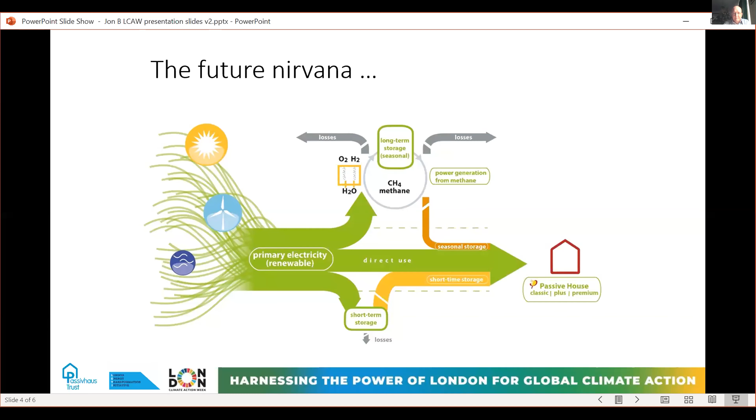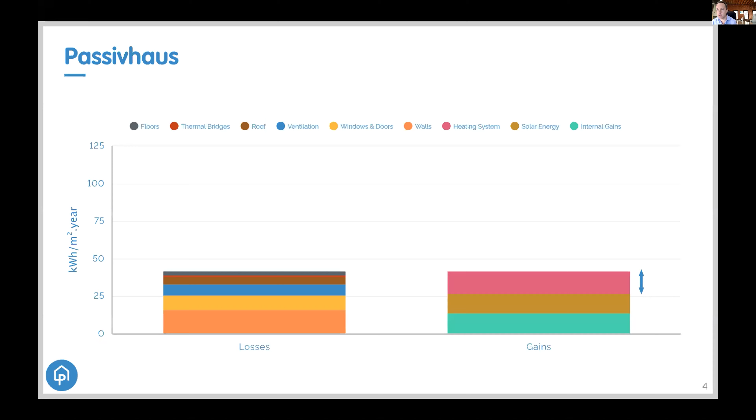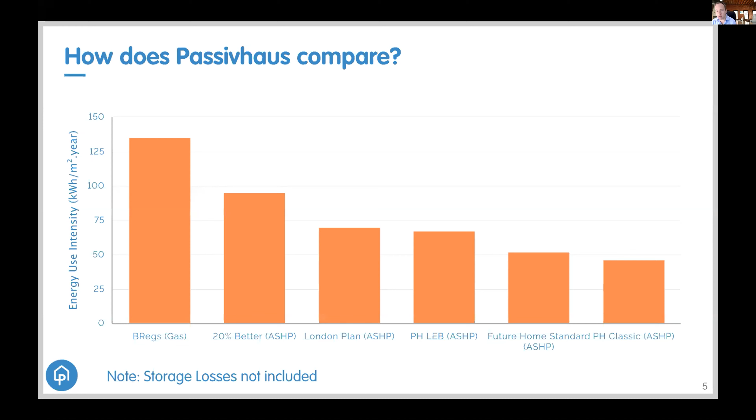So the little pink bit becomes very, very small and moves down to the magic number for Passivhaus, which is 15. That compares very favorably with other standards. You can see where we are now with building regs and a gas boiler on the far left, compared to Passivhaus, it's about a third or less. Even other standards - the London Plan zero carbon plan, the 20% improvement talked about in our recent Part L building reg consultation - Passivhaus Classic comes out better than all of those in energy use. The future home standard is an estimate of what it might be in the future; let's hope we get there, but it will be quite close to Passivhaus, which would be really great to see. So that's what Passivhaus does.

Let's now just go back very quickly 10 years and see what was happening. So in 2010 we had our fair share of man-made disasters, and you might recall the Deepwater Horizon.

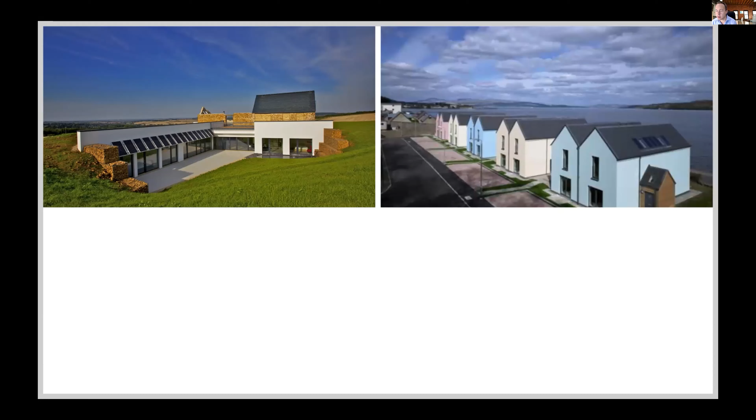And it was actually a year of firsts for Passivhaus as well. So we had the first Passivhaus in England, which was Underhill House. The first Passivhaus in Scotland, in Dunoon, inspired by Brighton's beach huts, apparently. The first cavity wall Passivhaus, Denby Dale in West Yorkshire.

The first Passivhaus educational building, Hadlow College in Kent. And the first Passivhaus light industrial unit, which was also in Kent, the Queen Hill Studio in Kent. So really beginning to see Passivhaus start to get off the ground 10 years ago.

And what has happened since? Well, it's really been a bit of a success story for Passivhaus itself. So we've gone from a very low starting point in 2010, those few pioneering projects, up to over 1,200 projects certified by the end of 2019. But actually more than that, it's the nature of the projects that has changed as well.

So who'd have thought 10 years ago we'd have seen this project, which is Goldsmith Street in Norwich, a Passivhaus social housing project, win the prestigious Stirling Prize in 2019. 93 homes for social rent, and a fantastic architectural achievement, and also a fantastic place to live from what we hear. Then we've got Agar Grove, another local authority scheme in Camden with what will eventually be 493 affordable homes. So again, the scale has increased significantly.

And then we've got Harris Academy in Sutton, our first Passivhaus secondary school. The Leicester Medical Centre, which is the largest Passivhaus building in the UK with over 13,000 metres squared of floor space. And coming soon, or soonish, our first Passivhaus leisure centre, St Sidwell's Point in Exeter, with 3 pools, a spa, a gym, a studio and a cafe. So, you know, just the pure scale of what we were doing with Passivhaus has increased immeasurably in those 10 years. But it hasn't all been good news, I'm afraid.

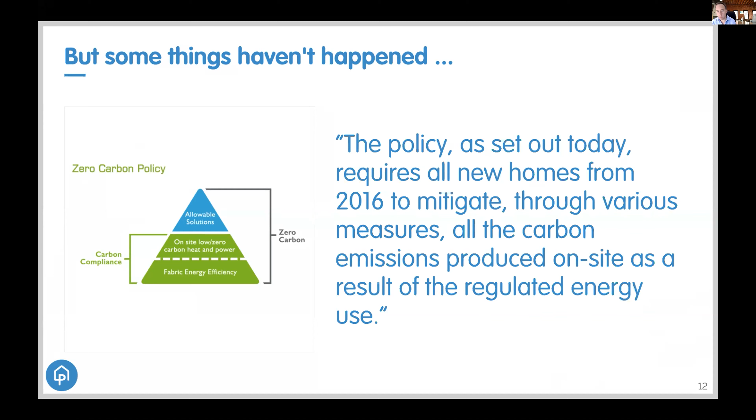So some things haven't happened. A number of you may recall the zero carbon homes standard, which we were due to enact in 2016, which didn't happen, was pulled. So that hasn't happened. And really the charts paint the picture.

So this is the EPC data, energy performance certificate data for new dwellings. The orange line is the EPC rating and matches with the right-hand scale. The blue line is our average energy demand that was lodged, and that's the left-hand scale. And you can see that as of about 2011, 2012, not much has happened, and we've kind of flatlined on lowering our energy use.

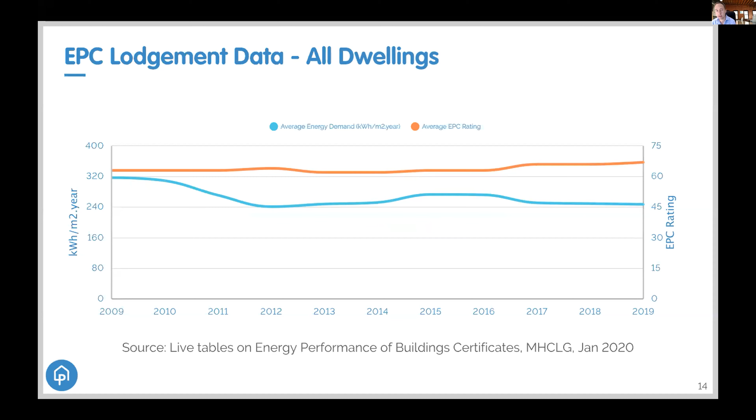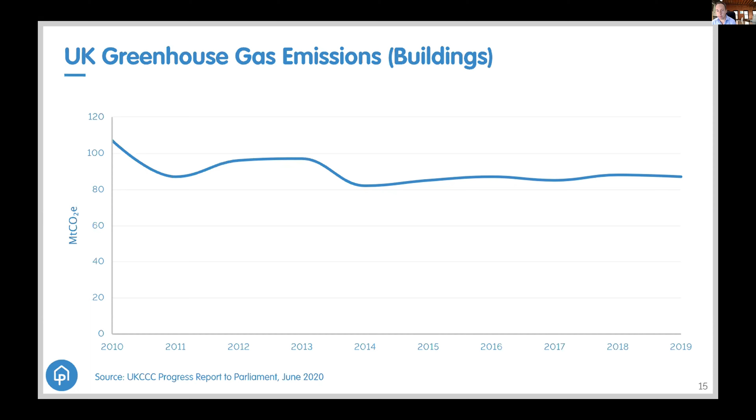And the story is exactly the same pretty much for our all dwellings, so that includes all existing dwellings when they get an EPC update. And that has also been mirrored in our overall buildings energy use, as recently reported by the Committee on Climate Change to Parliament. You can see that it actually has increased slightly over the last couple of years. So we've got pretty much almost 10 wasted years, sadly, in trying to lower the carbon footprint of our buildings in this country.

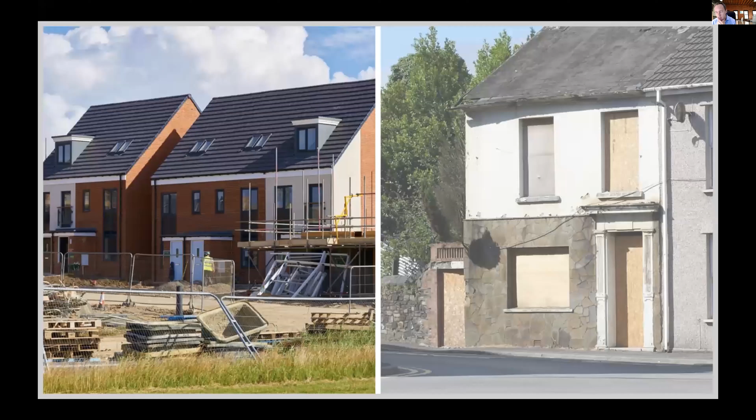So what do we need to do now? What can we do, and what should we do? Well, we've got 2 real areas related to this that need different treatment: our new build buildings, and our retrofit challenge. Maybe not all as challenging as this picture, but certainly it's definitely a challenge. So what could we do? What ideas have we got?

Well, there is an argument that we just sit back and wait for the grid to decarbonise, because we know that the grid carbon intensity - that's the amount of carbon per kilowatt hour of electricity used - is decreasing, and it's decreasing rapidly.

This is one of the great success stories of this country in terms of the power sector. We've come down a huge amount. We're already down to somewhere below 150, 130 to 140 at the moment, and that's due to come down further.

So all this energy efficiency business in our homes, trying to make our homes more efficient, is really expensive. It's quite difficult. So why bother? Why not wait for this to happen, and this will solve the problem? Well, unfortunately, it's not quite that simple.

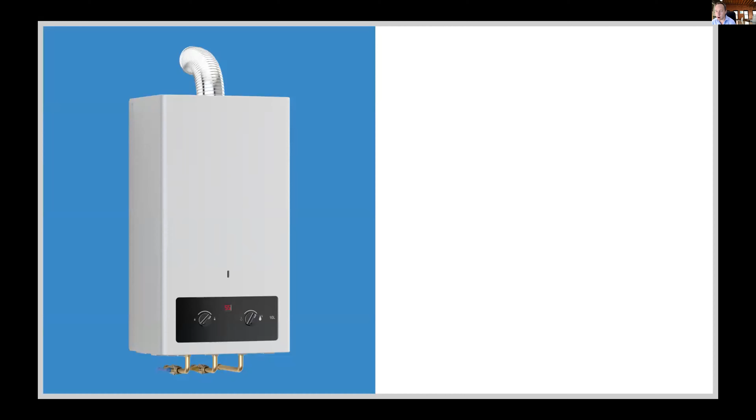There are a number of reasons, but the first is that most of us have one of these in our buildings or our homes, a gas boiler. We can wait for as long as we want for the electricity grid to decarbonise, and it will have no impact if we're using gas boilers, because gas boilers will still carry on burning fossil fuels. So whilst there are some other options, hydrogen and others, which I'll mention towards the end, the main thing we need to do is get off gas.

So if you want some basic rules for getting to net zero, the first one is to stop burning stuff, and in particular, stop burning stuff that comes out of the ground. So we need to move away from gas, and we need to capitalise upon that low carbon electricity grid.

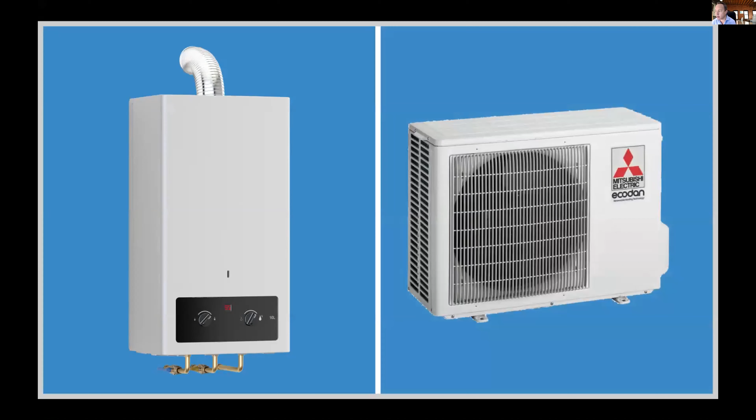One of the options is heat pumps, which will give us an advantage by producing hot water or heating using less electricity than a storage heater or a direct electric panel heater, for example. So these kind of things are part of the future, and part of decarbonising our heating source.

So why don't we just do that then? We'll take out our gas boilers and we'll put in air source heat pumps. Well, again, it's not that simple.

One of the answers is just to look at the peak load scenario. If we added 15 kilowatts, which is a fairly modest amount of heat for some of our homes, to every domestic building in the UK, then we would add somewhere around 125 gigawatts of extra load.

I know that if there are any grid engineers out there, they'll be talking about diversification, and not all buildings will be wanting energy at the same time. But just to give an order of magnitude, if they did all have an extra 15 kilowatts of electrical heat put into them, and it all happened at the same time, that's 125 gigawatts.

Right now, the total grid peak load capacity is around 100 gigawatts. So what that's saying is if we did that, we would wipe out the capacity of the entire grid, and that's not just for housing, that's for everything.

And even in 2050, and this is obviously a sort of crystal ball looking to the future, the grid capacity is only slated to be around 260 gigawatts. So giving pretty much half of that to just our domestic buildings, and just for heating, is not feasible.

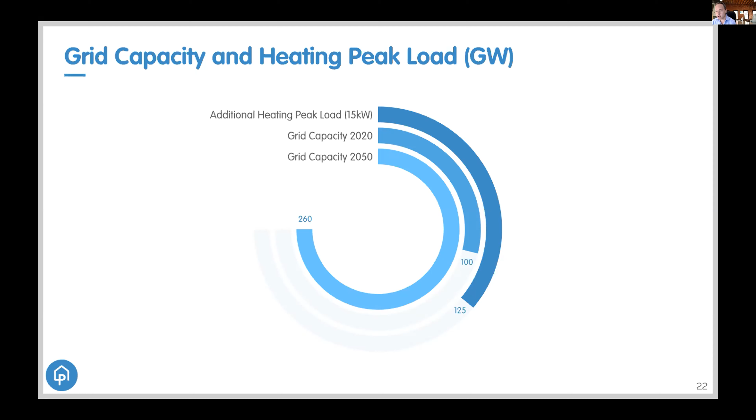So what else could we do? Well, why don't we just throw renewables at the problem? Just as many solar panels or wind farms, whatever, as we can manage. Well, let's look a little bit at that.

If we are trying to get to net zero, we've got two main options. We can carry on as we are and use lots of energy, or we can make things more efficient and use less energy. For both of those options, the way you then get to net zero is you have to generate from renewable sources as much as you use. So in the first option, if you use quite a lot of energy, you have to generate all that energy from renewable sources in order to get to net zero.

Let me be clear, we have no option now. We have to be planning to get to net zero. With option two, we use less energy, and therefore we have to generate less energy from our renewable sources.

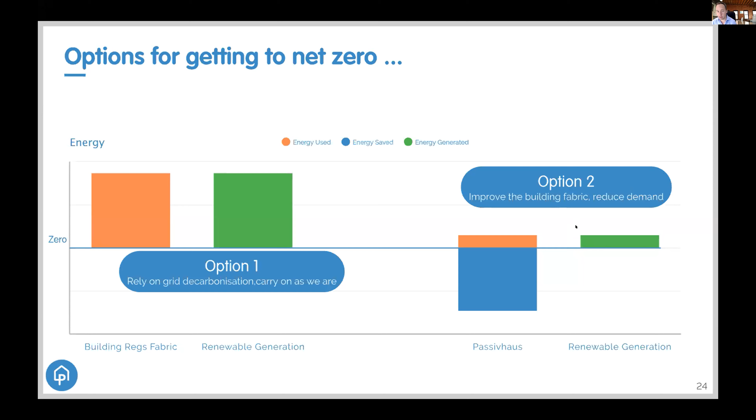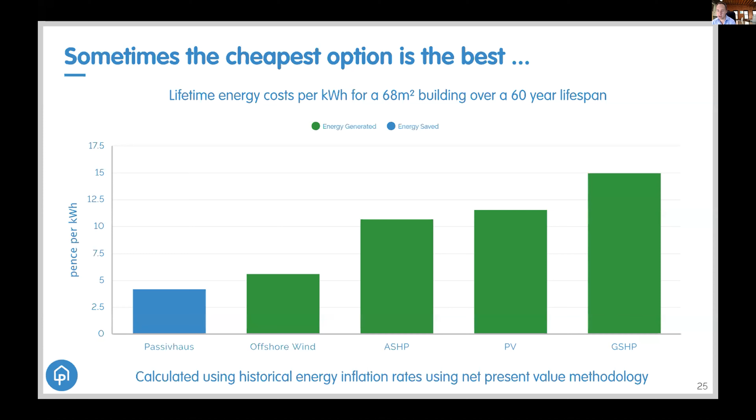But what we've had to do is save a lot of energy through our energy efficiency mechanism. If you look at the cost of that in more detail, this is an indication of the cost, pence per kilowatt hour, looking at energy generated versus energy saved. The cost of building more efficiently works out at around 3 to 4 pence per kilowatt hour, whereas actually generating that kilowatt hour instead of saving it is more expensive in all situations, across all forms of renewable energy we have. So from a financial point of view, it just makes sense to use less energy. The cheapest energy is the energy you don't use in the first place.

But the other thing to look at is: is this pot of renewable energy infinite? I've already alluded to the fact that we've got projections of grid capacity through to 2050, and projections for how much renewable energy we're going to have in the future, in 2030 and 2050. So let's look at what might happen if we made all our houses in the UK Passivhaus standard - not just new ones, but all existing houses retrofitted right down to the best possible fabric standards, so they use the minimal amount of heating energy.

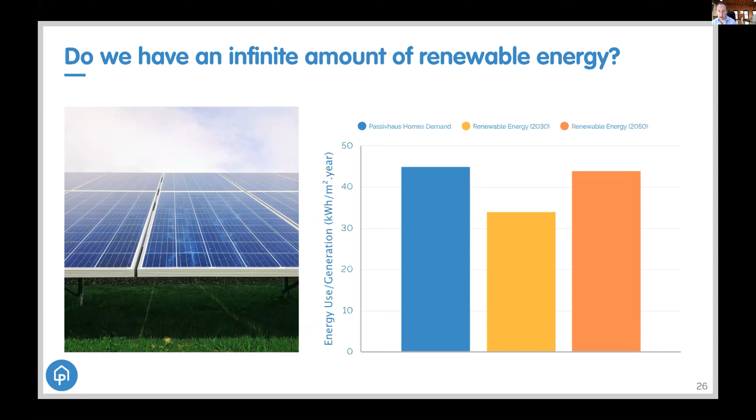That number, 44 kilowatt hours per meter squared per year, is what we'd be at in terms of energy usage for all those properties, per meter squared of domestic floor space. We can now compare that to how much renewable energy we'd have per meter squared - kilowatt hours per meter squared in 2030 and again in 2050. You can see that both the orange and yellow bars are not as high as the blue bars. What that's telling us is that if every home in the country was Passivhaus, on current projections, we would not be able to get to net zero, either in 2030 or 2050.

So I hope that gives you an idea of the scale of the problem. I'm not saying it's impossible. I'm saying it's a big challenge, and to say that we're going to blithely get to net zero in a couple of years without really doing very much, and perhaps throwing some renewables at it, is actually not the right approach. This is a big and difficult problem, and we need some serious answers.

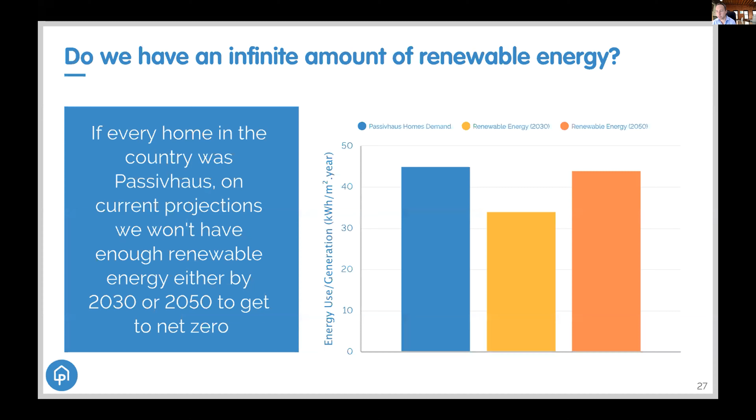So finally, why don't we just mandate every building to be net zero? Because that's going to work - that means everything has to be built to net zero. Well actually, whilst I'm really convinced that we do need to get to net zero, mandating every building to be net zero has got a couple of issues.

The issue is that we're potentially driving bad behavior. If you want to make a building net zero, what you need to do is generate as much energy as you use in that house. And what we know is that even if a house is built to Passivhaus standard - the best fabric standard we've got at the moment in the world - the amount of energy you can generate is limited, because you've only got the roof space on that house. If we've got a single detached dwelling, a bungalow for example, we can just about make that individually net zero with the amount of roof space for solar and the efficiency of that building.

But if you then make that building 2-story or 3-story, you've made more inside space, but you haven't changed the amount of roof space, because we're making very efficient use of that piece of land. What that means is that if you force or mandate people to make every single building net zero, either they will build lots of bungalows, or they will look for ways around it - offset schemes and other ways to get around that net zero requirement. And that's not what we want.

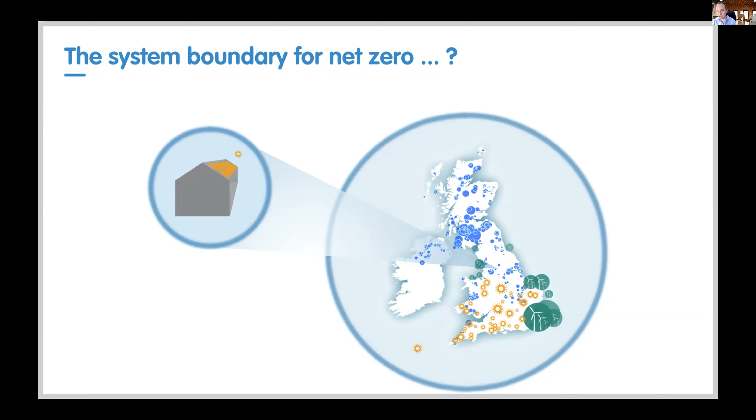And that's the equation we need to be looking at, not at an individual dwelling. So that takes me to really a summary of what we need to do for our new buildings.

Because this is so hard, we need to be at the best possible fabric performance that we can get to. We need to be using as little energy as possible, particularly for our space heating, which currently is our biggest demand. So that takes us towards a very good fabric standard, Passivhaus perhaps as a minimum. We could be going beyond Passivhaus, and perhaps we will need to go beyond Passivhaus. Anything less is simply adding to the problem.

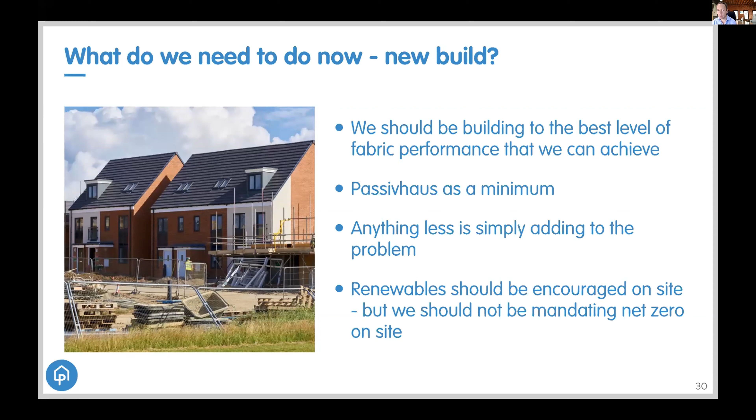Every house we build now will need to be retrofitted because it's not at that standard. And finally, we should be encouraging renewables. We should be encouraging the best possible use of the site. But if we mandate every building to be net zero, we will drive bad behavior and we'll get outcomes that we don't want.

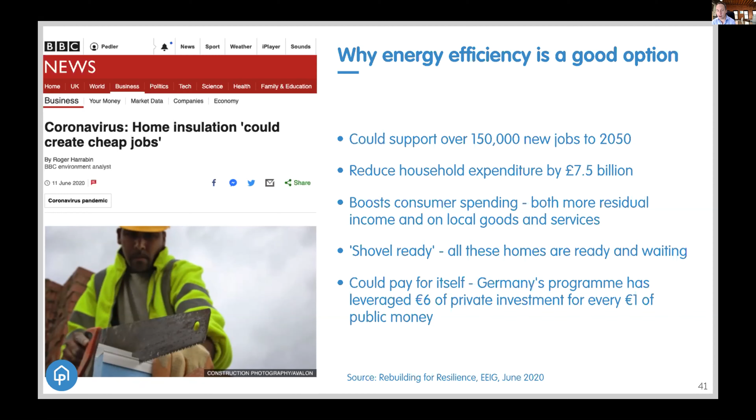It could pay for itself, and just to coin a phrase that's been popular recently, it is indeed shovel ready, because all those homes are out there waiting to be insulated, waiting to be retrofitted.

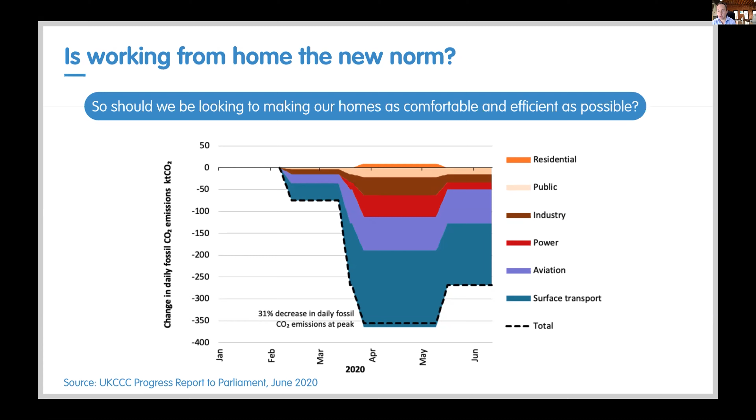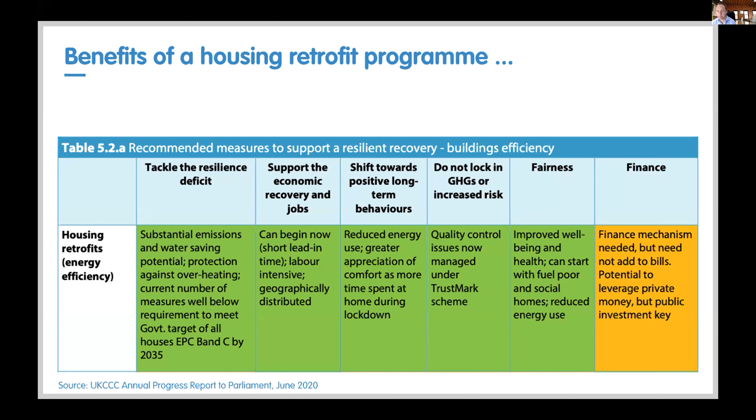There are more ideas as to how we can leverage our construction sector to support this green recovery. I mentioned the Prime Minister yesterday, he made an announcement of 5 billion of money. Some of that has already been announced, but let's say it was all 5 billion of new money. And let's say that the climate change budget we talked about earlier was around 45 billion per year, which is what the Climate Change Committee has said we actually need - that much investment every year, year on year to 2050 to fully combat climate change. So it might be a start, it might help us get out of recession, but there's a lot more to do.

And that is only 0.23% of GDP. So in another 10 years' time, perhaps we might still be here with even newer technology, talking to each other and looking back at what happened and where we went. What will we have concluded?

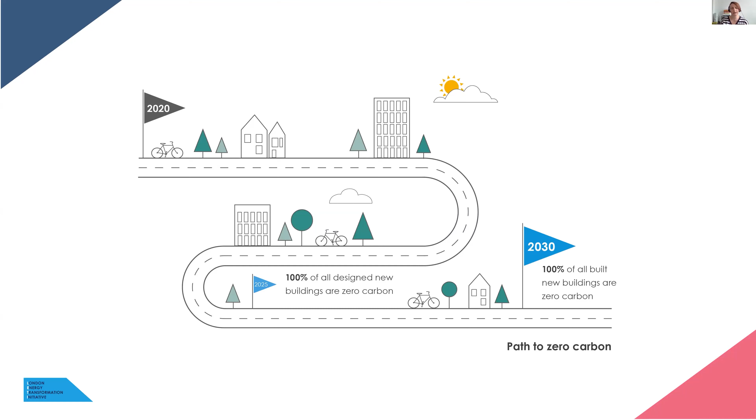If you work backwards from that, it means 100% of all those buildings need to be designed as zero carbon by 2025—perhaps 80% by 2024, and so on. So really, right now, today, we need at least 10% of all newly designed buildings to be net zero carbon. This allows a feedback loop and learning curve so we can keep hitting those targets year on year. It's a daunting task, but we're going to show you how to do it.

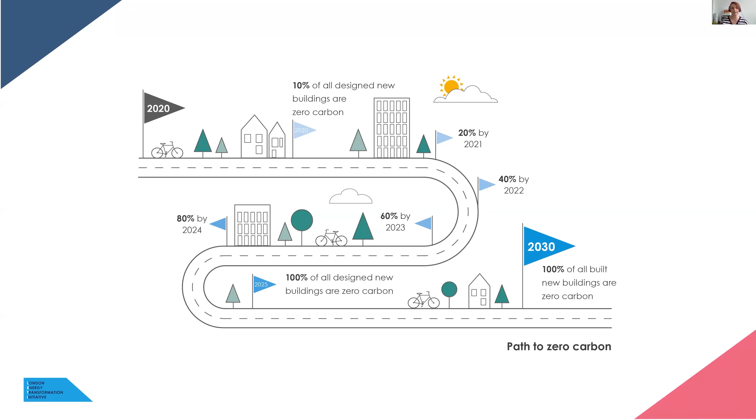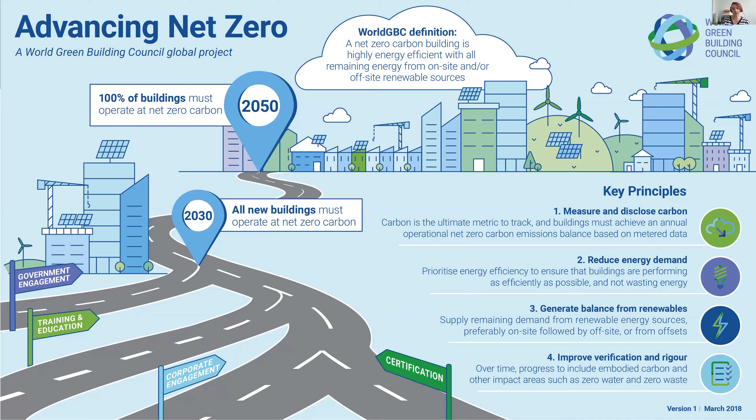As I mentioned, we did a precursor to the Climate Emergency Design Guide—a one-pager that came out in the latter half of last year. In that process we had a lot of conversations with the World GBC to really get to the bottom of the definition of net zero and what we could agree on as an industry. We consulted policymakers, clients, contractors, designers, and consultants—not just navel-gazing among other design consultants.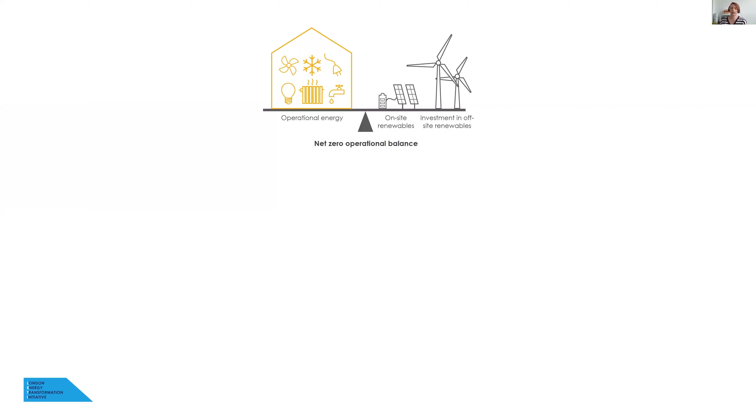I won't go into this too much since John did a good job explaining it in his presentation. One key concept is the net zero operational balance—what you actually use in your buildings versus what's available to you on site and off site nationally. It's a crucial balance that gets us thinking about two system boundaries: the one within your building and the one within the national grid.

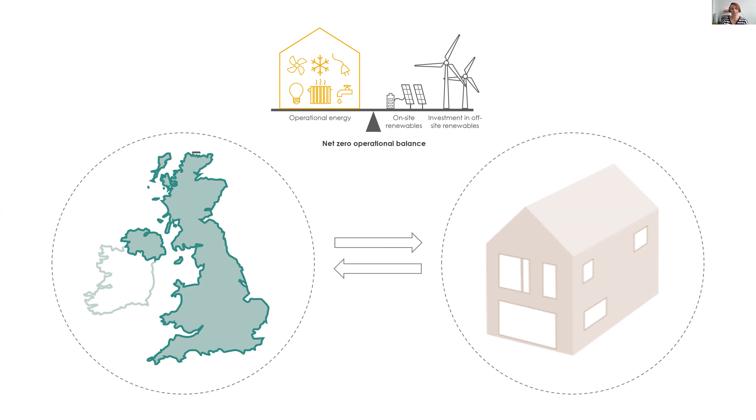The five sections we expanded on in the one-pager started with operational, which is probably the one most people are familiar with. We set some targets and fabric performance standards there. A fundamental piece of this design guide is moving wholesale away from measuring carbon as a percentage reduction in CO2 emissions, because that's not an absolute number—it's a comparison with a fixed building specification that permits inefficiencies and doesn't account for everything. So the Climate Emergency Design Guide says we must move to an absolute number: kilowatt hours per meter squared per year, energy use intensity, or EUI, measured at the meter. It's black and white, no bones about it. This is a fundamental concept—everything we talk about is in EUIs.

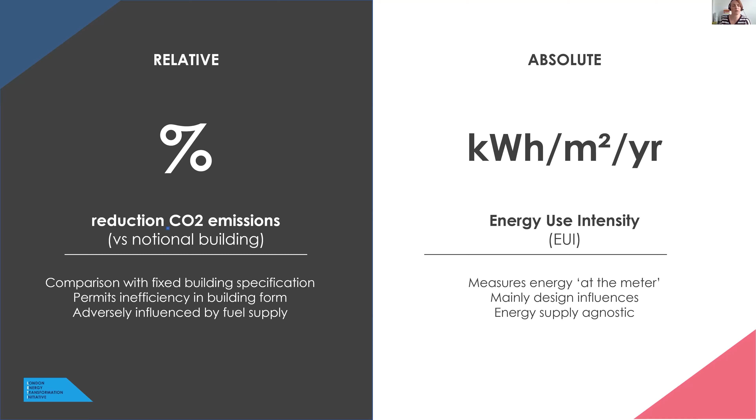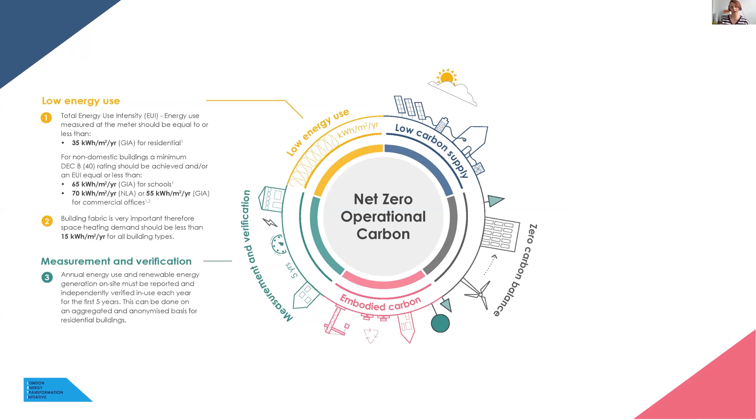The next part of the one-pager talked about measurement and verification. The performance gap has been known about for some time, and we feel this is a fundamental part of the process—mandating that annual energy use is verified each year for the first five years, then disclosed and shared publicly. I'll come back to embodied carbon later. Low carbon energy supply is about what we're getting, where it's coming from, what we can rely on, and the trends. Then there's the zero carbon balance, which I spoke about a moment ago.

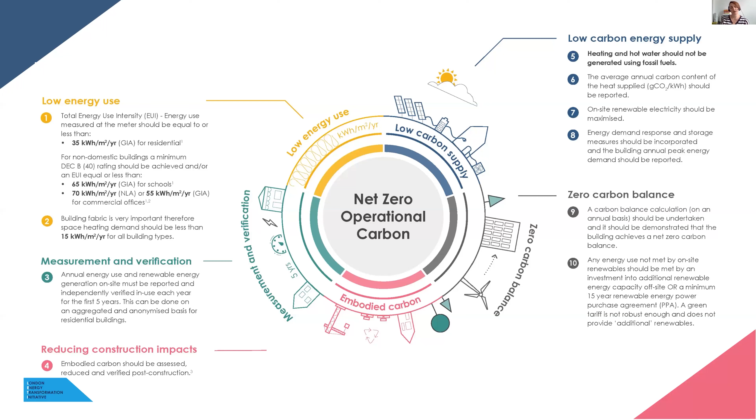Those are the five key aspects of the one-pager, which segued quite smoothly into the overall design guide—the five chapters largely follow that structure: operational energy, embodied carbon, the future of heat, demand response, which I'll talk about, and data disclosure, where we'll discuss that performance gap.

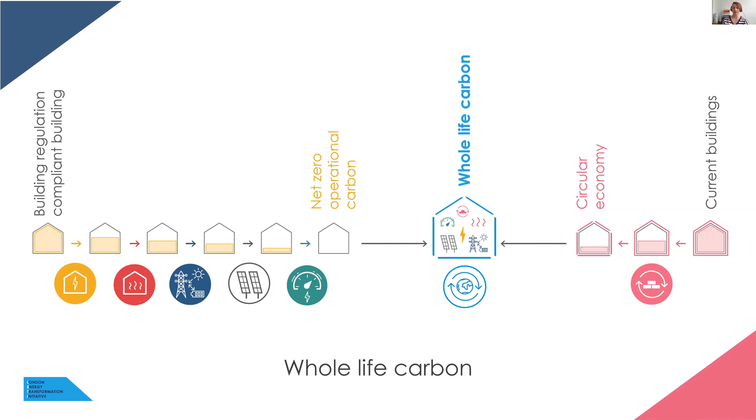On the right-hand side are elements to do with embodied carbon—something you've probably been hearing a lot more about in the last 6 to 9 months. That's about the circular economy and reducing its impact. Both sides together in that little house represent whole life carbon. Unless you're considering both together, you're not really talking about net zero. We talked about the balance, and we'll go through that again.

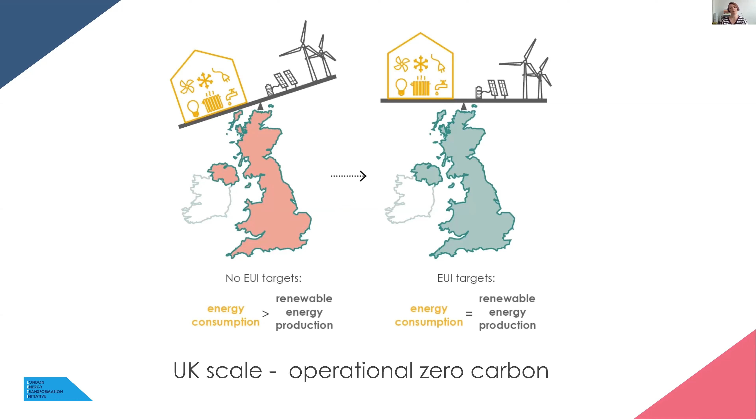So what the design guide takes you through are a series of archetypes or typologies. There's a one-pager for each of these typologies, and we worked out that 75% of all new buildings can be covered by 4 archetypes: schools, small housing, medium and large scale housing, and offices. Obviously it doesn't cover the entire built sector, but we thought that was a really good start in covering the vast majority of new build projects.

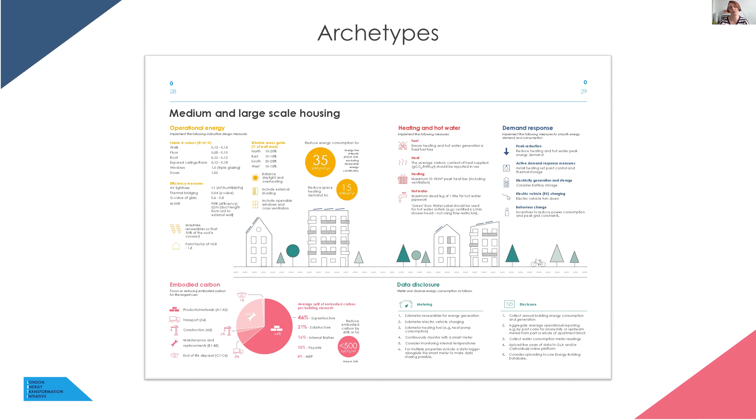Similarly, this is probably more project manager, client-led, and project architect-led. It gives you a stage-by-stage guide as to precisely what to do within the process, how to roll that out. We've got one for operational and one for embodied. So if you have nothing else, you've got that in front of you at your design team meetings, and you can start understanding what your key tasks are to roll out. We thought those two guides really were quite fundamental in giving people an immediate sense of what their roadmap is.

So the key performance indicators - this happens to be the operational energy chapter. The first set of numbers are to do with the EUI, the energy use intensity. Those are fairly well-researched numbers because with the archetypes came a whole army of people doing modelling of those archetypes, a sort of bottom-up modelling, to arrive at those numbers. So there was a bottom-up set of numbers and a top-down set of numbers to understand what would be available from energy outside the building. We've got space heating demands and renewable energy as well.

So in arriving at those targets, this speaks a bit to the bottom-up modelling. The current Part L average is 140 kilowatt hours per metre squared per year. The really good buildings are 43. The bottom-up modelling that we tested is a bit lower at 32. So I think taking all things into consideration, we arrived at the LETI proposed target at the bottom there of 35, which we do believe is quite achievable.

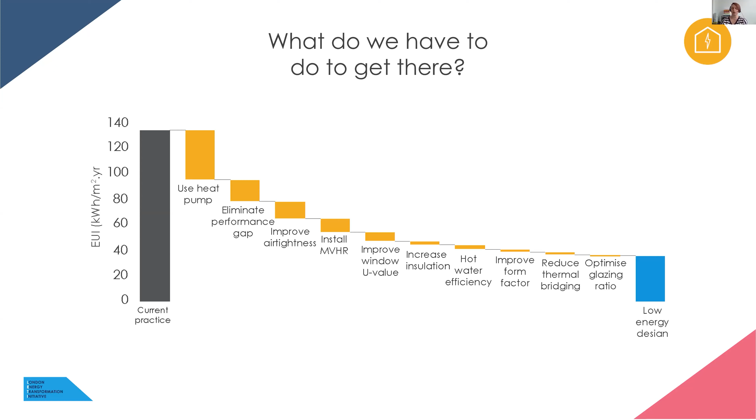So what do we have to do to get there? Well, I think lots of people tend to take on one or two things per project. What we're saying is you've got to throw everything but the kitchen sink in there. So we're talking about heat pumps, eliminating the performance gap, improving your air tightness, MVHR, U values, insulation, and so on and so on and so on. All of those things together will get you to the lowest possible energy design you can make in your building, and thereby requires you to rely as little as possible on the energy supply.

This was a really interesting one for me as an architect, because I always understood that, for instance, north-facing windows performed less good. But we actually understood very quickly that it probably takes twice as much energy to heat a space if it's got only north-facing windows as not. So it certainly speaks to passive design, and starts to raise some very interesting questions about urban design, north-facing streets, and all sorts. But certainly known from the London plan that single aspect units facing north are not desirable, and this is just another reason to understand that a bit better.

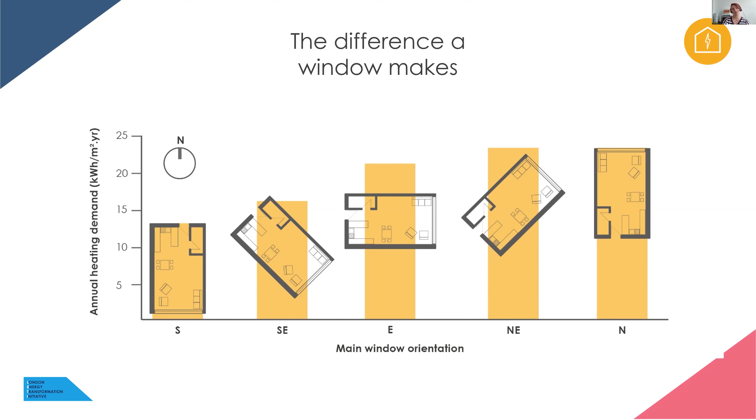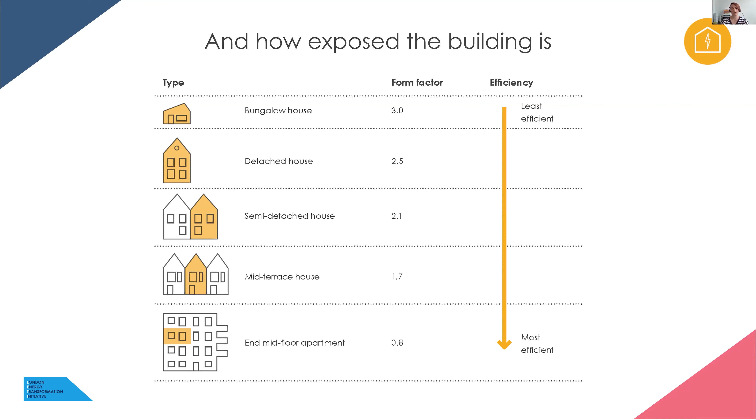We also know that single detached houses perform the worst because obviously they have the most exposure to the elements, whereas larger apartment blocks have got less exposure and tend to be the most efficient. I won't go through all the nitty gritty of this, but these are all graphics that are in the design guide, so easy enough to get to if you haven't got access to this presentation. We take you through what we call a heat decision tree, which again just guides you every step of the way with your consultants and clients to work out, are we doing enough every step of the way?

And it gives you, if you work through that tree, you can make sure that by the end of it, you've reduced your peak demand as much as possible.

So just a quick word on demand response measures. Really, that's about flattening the curve, flattening the energy curve. It's a mantra that's in the forefront of our minds at the moment. It's about relying less on the grid so intensely at certain parts of the day, and finding ways for the grid and the demands of the building to work in unison better.

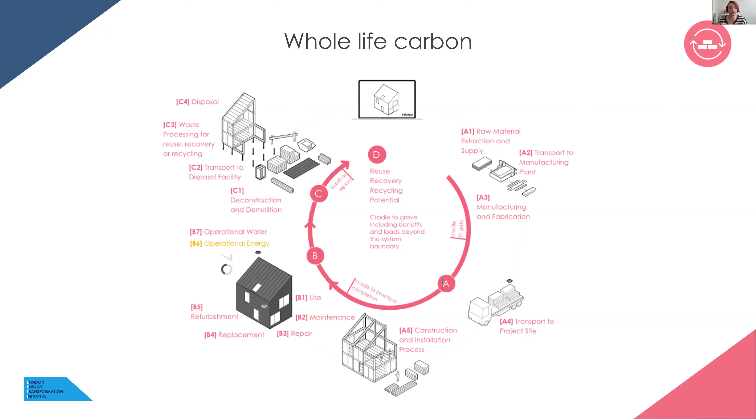We talk about whole life carbon in there in terms of where it's coming from, the raw material and extraction, how it actually gets to your site, how it's put together and installed, what it means in relation to the operational aspects of the building, and most importantly, which is something we don't often think about, is how the products and materials are either dismantled or recycled at the end of their life, so a cradle to cradle approach.

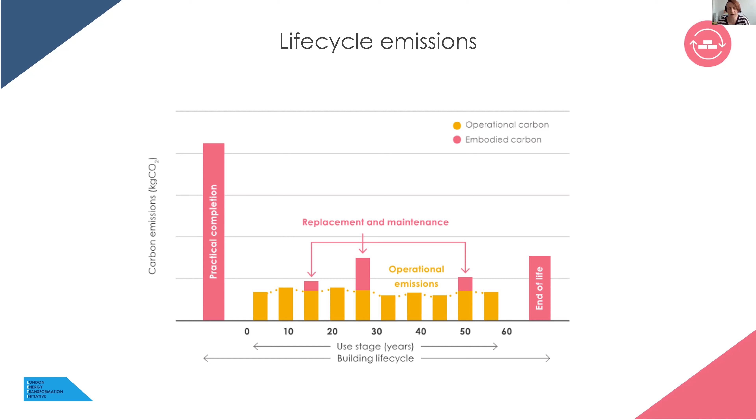Another couple of key concepts quite important to do with embodied carbon: at the beginning you get what we call a carbon burp when you're actually installing everything on site. In terms of the relationship between operational and embodied, for most of the course of the building's life, you get a fairly consistent operational carbon output. But somewhere in the early and middle part of the building, if you get replacement and maintenance, and then obviously at the end of life, you get another carbon burp in terms of embodied, depending on what your strategy is for dealing with those materials. So there is a distinct relationship between operational and embodied.

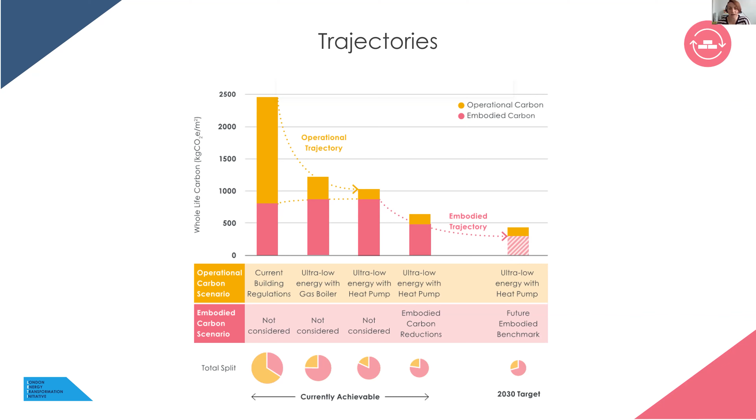over time, it means there's a lot more focus on the embodied aspect of things. And another way of looking at that, that's just another pie chart really saying the same thing: an ultra low energy building on the right hand side with a lot less operational load, but a lot more embodied load.

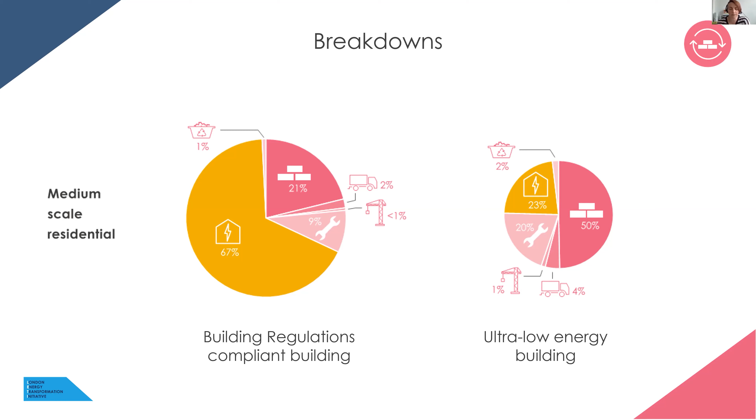I would encourage you to leaf through the document, but some of the key things we do know is that superstructure and substructure account for more than 65% of the embodied carbon within a building, which is why everybody gets so hot and bothered about CLT, and where the industry is going with CLT.

There is also a great deal in facades, but I think traditionally a lot of architects have focused on the internal finishes, which yes are important, but if you consider the amount of mental hours in the day and energy you spend trying to understand the embodied carbon in internal finishes, you quickly realize it's the big decisions in the projects that start to influence more dramatically where we're going with embodied carbon.

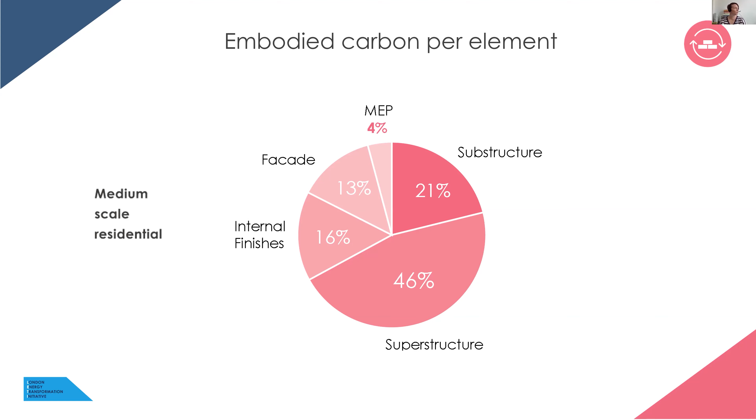We've set out some targets with embodied carbon. I think one of the key aspects is having a whole life carbon consultant on board with the team from the get-go. It's not really something architects or engineers tend to do, or are able to do in depth. So having that consultant on board from the beginning is fundamental. We're suggesting there are overall percentage targets over time that you ought to be reaching.

Just a note to say we do have quite a lot of appendices, I'm not going to go through the detail of that. The document is split into a front end with high level information per chapter, and then we reference a deeper dive set of information in the appendices and glossary. So no matter how much time you've got, whether it's 1 minute, 20 minutes or 2 hours, there are different ways of interacting with that document.

So next steps - well, we know where we need to get to: 2030, 100% of all buildings at net zero, and 10% of everything now, today. Quite daunting. So LETI Pioneer projects - we have a scheme where you can sign up a project online as a LETI Pioneer, and we've established a LETI consultative community that can help support you in doing that, and we would encourage you to do so. The more you learn from us and we learn from you, the quicker we'll get to where we need to go.

In my role, in my practice at Woods Bagot, is certainly more client facing. And I think the more we reach out to our clients, be they private developer clients or local authorities, to get them into this conversation, the more impact we'll have. And the same with policymakers. So really it's a triumvirate solution between the three of us, and I think unless we go down that route, we won't really get anywhere.